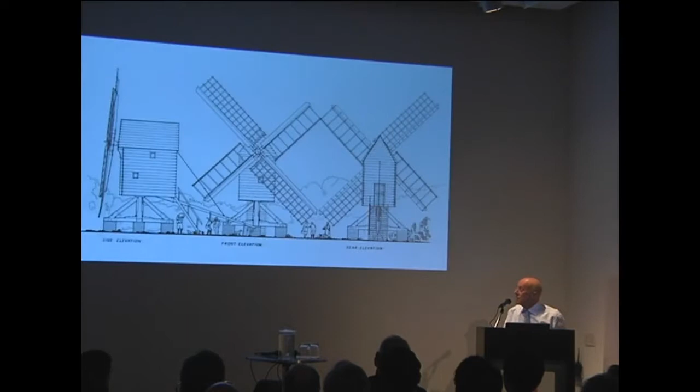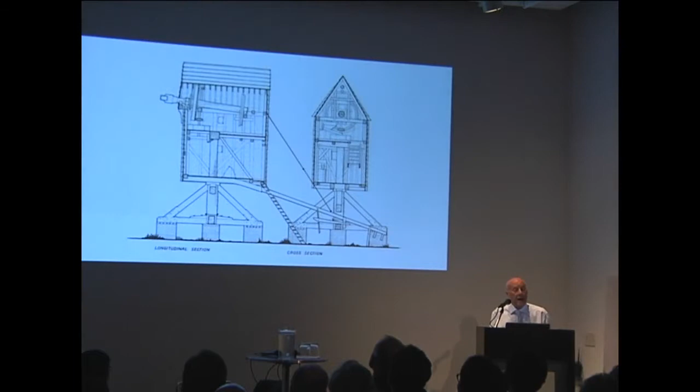I'm also photographing extraordinarily beautiful buildings like the Palm House by Decimus Burton and Richard Turner at Kew Gardens. And when I'm not photographing, every summer I'm drawing, I'm measuring buildings. And what buildings am I measuring? I broke the mold. Everybody at Manchester were drawing buildings like Georgian houses in the classical tradition. But I was fascinated by that anonymous tradition, by windmills, by big barns, not just what they looked like, but how they worked internally, how they were made, how a windmill functioned, and how the great barn was put together.

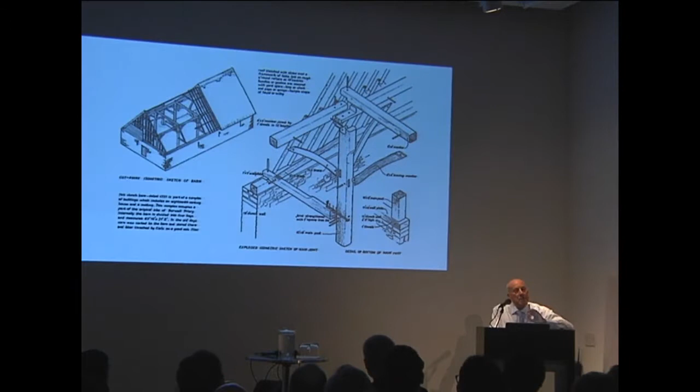And then later, when I left university, I discovered that I wasn't alone in terms of being so impressed and admiring those anonymous architects and engineers, because there was somebody called Bernard Rudofsky who in 1964 created an exhibition at the Museum of Modern Art and produced this book. And it was called Architecture Without Architects. It could have been called Engineering Without Engineers. But it celebrated those extraordinary achievements.

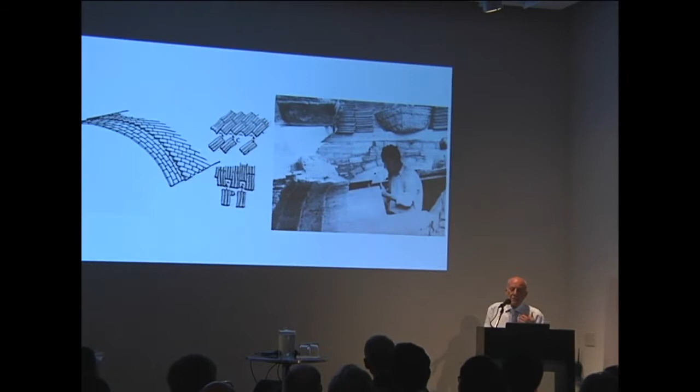And in those pages, we also see the tradition which led to Guastavino, because it was centuries old and centered mainly around the Mediterranean. So these anonymous architects, engineers, builders, craftsmen were essentially responsible for the achievements that this great exhibition in the museum and the books and the scholars are celebrating today. And the fact that he was able to develop those craft-based construction methods and patent them, and then lead to the kind of works that we've been touring earlier this morning.

How do we define those characteristics? Well, essentially, it's about optimization. He was able to create great spans, beautiful forms. They were fireproof. They had less mass. They did more with less. They were cheaper. In actual fact, he was competing on price. The fact that he produced something extraordinarily beautiful, which has endured over the centuries, is another great testimony. But he was just scoring on cost.

And there were wonderful stories in this book on that. And he was able to build quickly. He was able to build faster than anybody else. This is a very interesting characteristic. I mentioned Paxton. Paxton did the biggest building in the world. And he did it and designed it and built it in 8 months. And it was the cheapest thing that anybody could do. Nobody could do it in twice the time, at twice the cost.

So this tradition of doing more with less is, interestingly, I think, one of the prime characteristics of this anonymous theme in architecture, craft, structures, and is inextricably linked to issues in a market economy of materials and labor, the cost of materials and the cost of labor, and the way in which that might change over time has led to the birth of new technologies and the decline of other technologies.

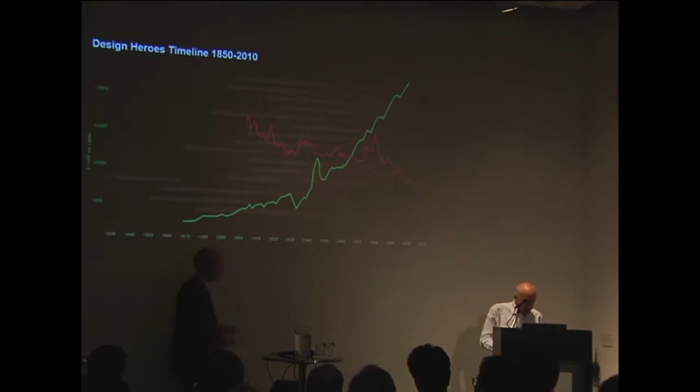So I want to start, or at least continue the theme of optimization by talking about shells, because they're such an extraordinary form. Just structurally, they're an amazingly efficient form. And I've put together a video, but I've got the models here, just the same models. Yes, thank you. This is just a hanging chain model. Very, very simple. Simply a series of interlocking chains which have no stiffness of their own. So they're only sagging under their own self-weight. They form the natural form that those chains with no stiffness of their own fall to under vertical load.

Then if I do the same thing with a form which is held in 4 points, we have a three-dimensional form, but exactly the same thing. It's a hanging chain. And the point about this form is if we find a position for any geometry that we want to have, any corner conditions, and we solidify that chain and turn it upside down, then we have a structure which in reverse perfectly resists the same load in compression rather than tension.

So I've tried to show with these models the difference between a flat plate. This is as flat as I could get it by hanging it and fixing it in resin. So this is basically a flat plate. There's no curvature here at all. And there's not very much stiffness. It'll move a lot under not very much load. That's most of the floors we stand on.

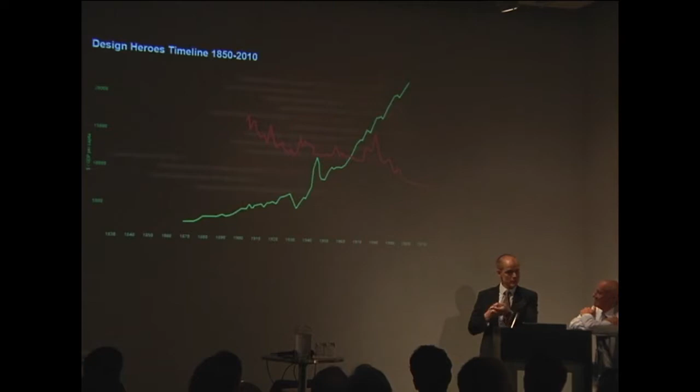What we found very interesting is when we looked over the period, over the 100 years, at what makes construction cost. Construction cost is made of materials and labor. Those are the two ingredients. A little bit of direct energy, that is the energy that powers the machines on site, but mainly the materials to make something and the labor to build it, us, people. And what's really interesting is that materials have got pretty much constant or slightly cheaper, and of course labor, that is how much people earn, has quite understandably got far, far higher.

And I was interested in why that was. Why would that be? Would you imagine that materials would get cheaper but labor would get much, much more expensive? And the hypothesis I have, after quite a lot of research into the area, is energy. Everything comes down to energy. The cost of a material which doesn't have a scarcity value, which doesn't have a brand, so not gold, not diamonds, not Gucci handbags, is pretty much directly related to the energy used to make it.

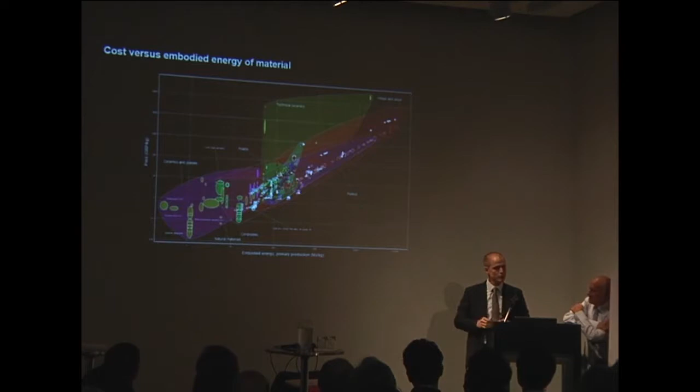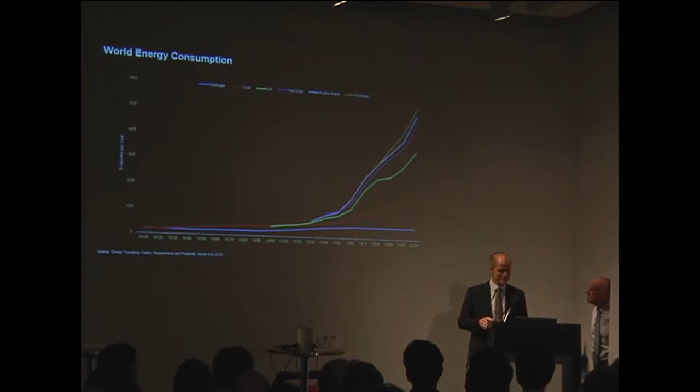Then when we move on to labor, why would that not apply? Well, labor basically is the amount of energy we consume. The amount of energy that society has consumed is very, very closely related to the GDP, the gross domestic product of our economies. So I found that really interesting, and I wanted to investigate where that took our design heroes, because the first design hero that Norman and I agreed on very quickly was Eladio Diesti.

This is a building that Diesti won a competition to refurbish. He kept the walls; all of the other entrants knocked the walls down. He kept them and built a new roof with, once again, this single layer of brick. So a labor-intensive process, but one that he could carry out, as well as being an absolutely extraordinary designer. This is the internal view of that, also a beautiful effect.

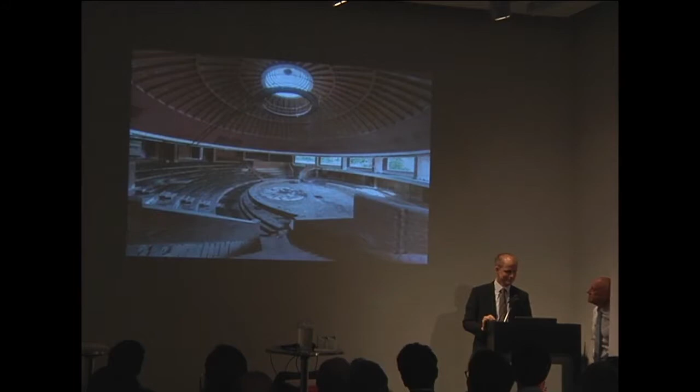So then I move on. Then I say, well, okay, so that was areas where there was a low labor cost. What about the rest of the world, Europe and the United States? And of course the story there is different. Labor's become far more expensive, so much so that in 1954, a Guastavino shell, because they were pretty much finished, they were just beginning to think about winding up, cost twice as much as a concrete shell. And the concrete shells really came from Europe, Germany in particular.

But the first of the heroes that we wanted to show was Pier Luigi Nervi, who solved the problem of buckling in a shell, which is the big challenge of concrete shells, by having these stiffeners, which were cast into the concrete. So he used extremely thin concrete, 4 centimeters thick. This is the Palazzo dello Sport in Rome, to make these absolutely beautiful structures. And he was very conscious of that. He was aware of the beauty of what he was doing. That was his concern.

And then to Germany. Germany was really where a lot of these shells came. There's quite a lot of load tests that were carried out like this, which you just think you'd really want to maybe put a sandbag there or something first.

So what happened in Germany, which I found absolutely fascinating, and in fact through this process learned more. I knew about the shells, but I didn't know about the history, is a company called Dyckerhoff and Widmann actually started simply making things out of concrete. They didn't start to make shells. They just thought concrete was an interesting material at the turn of the century to make things. And they made statues and concrete pipes. And then in their later generations, around about the 20s, they thought that it would be an interesting material to go a very long way.

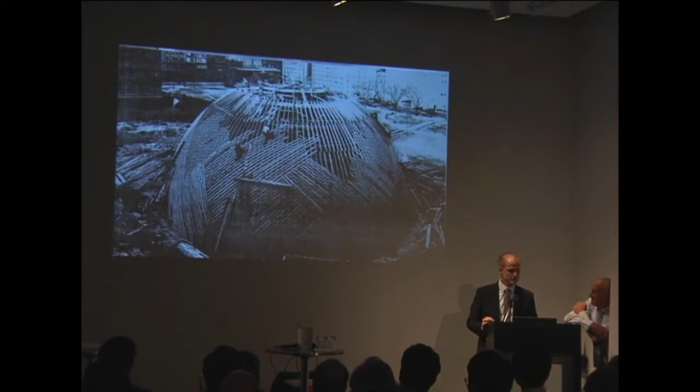And then from there, they took their shell technology to the States, and that was in the 30s with an engineer called Anton Tedesko, again a design hero of ours, and an extraordinary man who took this technology, and really that was the moment that Guastavino started to face very stiff competition, and they were sort of aware of it, but you could see that they hadn't completely grasped just how serious a competition it was. This is the planetarium that was built and sadly knocked down in 1997. But this is the Hershey Stadium, which still exists and spans 70 meters. It's a barrel vault with ribs and is only 3.5 inches thick in the middle.

Here's the most extraordinary photograph of it being built. It was built by Hershey's employees. That was what Milton Hershey decided should happen. So those are the people who normally work in the chocolate factory, building their own stadium. And there's the finished shell.

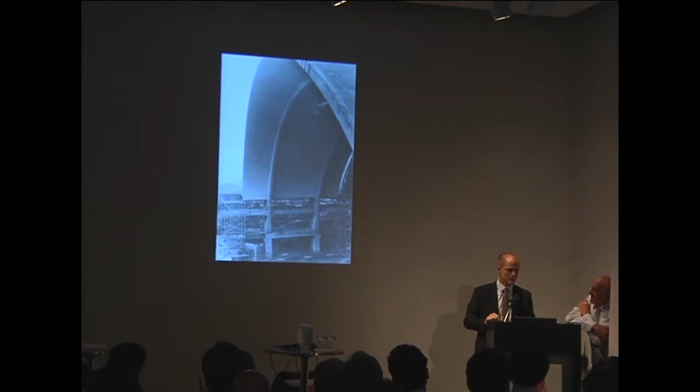So once again, extraordinary that a new technology came in as a result of optimization for different constraints, that instead of labor being plentiful and not too expensive, labor became more expensive, and so a process involving less labor was a more optimized response to that.

The final of our heroes that I wanted to talk about as a shell maker, and really the person I think who took shells to a whole other place, is Heinz Isler from Switzerland. And he took these very basic hanging chain models I was showing you and actually set them out and measured them. So he spent a lot of time, this was all obviously before computers, taking shapes, hanging them, and then measuring them and building them, which just seems incredible.

He also took pneumatic structures. He basically put air into a rubber surface and measured the surface that he got as a result, and once again built it. So this is the paper that he submitted in 1959 for the first conference of shell structures, and it blew everybody away apparently. What I really like is the fact he put etc. at the bottom. And sort of just an unlimited number of different forms could be created with double curvature. The whole point being there must be double curvature.

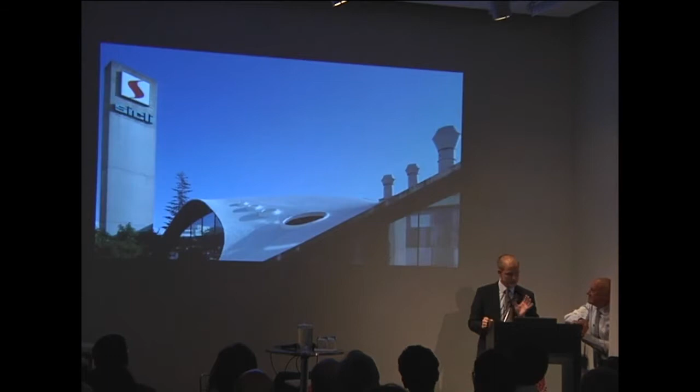This is one of his most extraordinary structures. Once again, just for a company, for the Sicli company in Switzerland. He did know about buckling, by the way. These things weren't done innocently. He did some quite impressive calculations to decide whether or not they could be achieved. Most of his work was done in Switzerland. He wanted very, very close supervision of them.

Here's another one in Switzerland. And then finally, I consider the most extraordinary structure, once again in Switzerland, exactly the same thing, taking a form, turning it upside down and setting it, measuring it, and then building that structure.

The other thing he did, which I find incredible, is in order to demonstrate this to himself and to others, he'd take blankets and he'd put them into his garden and spray them with water in the winter, and they would freeze, and he'd turn them upside down. And here's one of the examples of that.

I think that there are many ways in which we can find forms, and in one sense, these are the forces of nature, gravity, acting, frozen, coming from a somewhat different direction.

Buckminster Fuller, somebody that I was privileged to work with, collaborate with over the last 12 years of his life, was inspired by nature. And I can't remember any conversation with him where he didn't relate and demonstrate an affinity with the natural world, with spiders' webs, with shells, with plants.

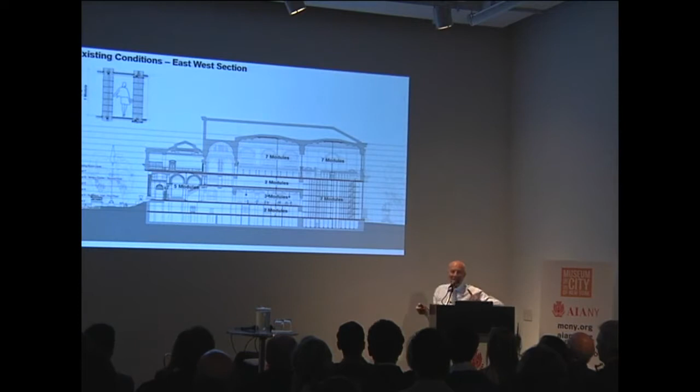Well, what you should see, I'm going to have to paint a picture for you. You should see the stacks. Okay. And as you can see, the stacks are on that module. So that is the module in that direction, and that is the module in the other direction, which is driving the geometry, the setting out, the architecture of this incredible, splendid building.

You will notice that the stacks are now empty, and they're always going to be empty, because it was, well, not always, it was for a long time decided that the books would have to move, because otherwise the Rose Reading Room sits on top of an unprotected structure. So you cannot have combustible materials. Now, the first move in that direction was in the last century. And that move, you can see the start of it here.

It was the opportunity for the library to vacate the stacks and to create safe, up to present day standards of preservation for rare books for the research library, to put those in appropriately protected space on site with exactly the same volume as the stack storage area, to house between 3 and 4 million volumes of books. And if you were to go there and see where those are on site, they're in this part of the 2-story building. The other story is going to be fitted out so that it looks like this.

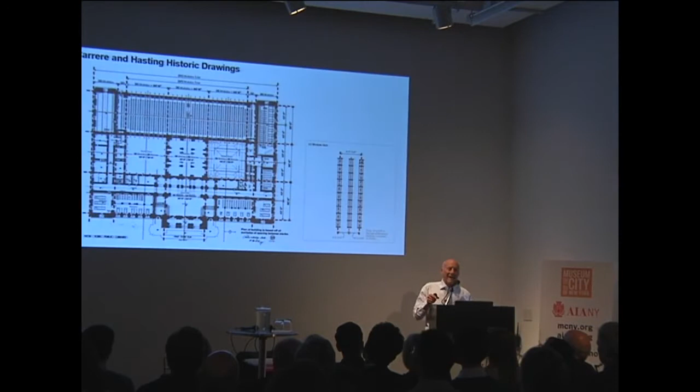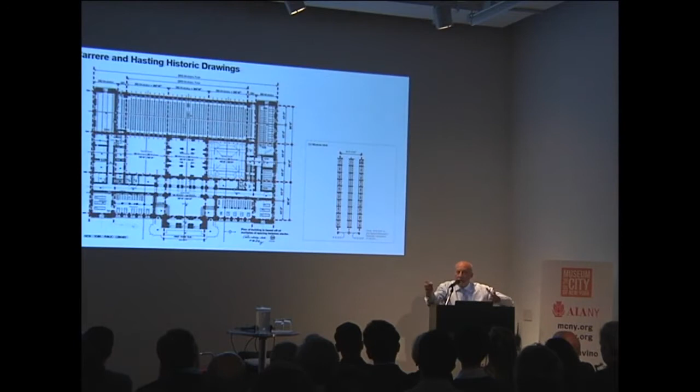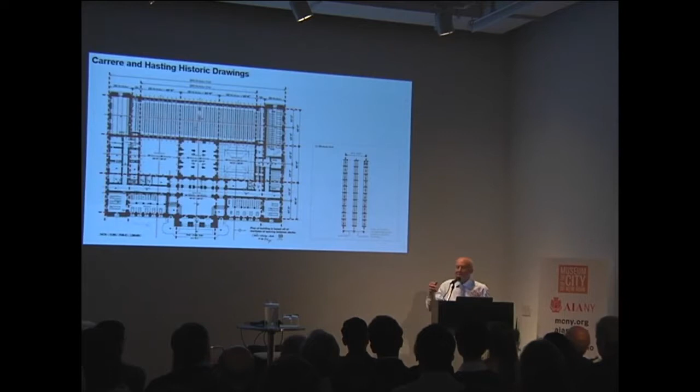So at that point, we stopped in our tracks, and I got Roger, and I had everything that had been designed on the project with the structure and the columns in the space, all pinned up. There were just the two of us, in the office. This was a little while back. What would happen if we wanted to keep the stacks? Some of them, all of them, and you can't put a structure in the space. And Roger said, I don't know anything about the New York Public Library. So I said, well, immerse yourself in it, give yourself a day or so, and see if you can work miracles.

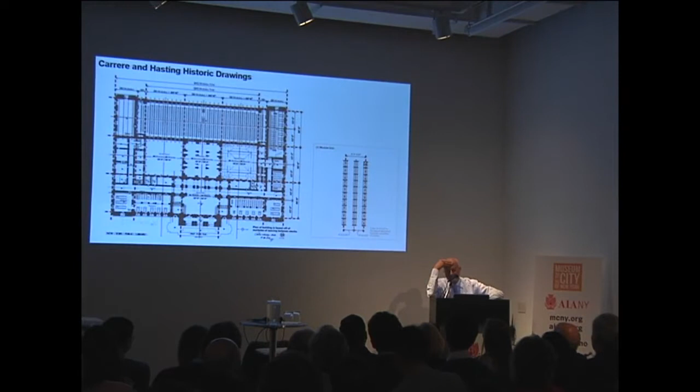And extraordinarily, and it's better if Roger explained this himself, but I'll do it for convenience, Roger discovered that all the windows onto Bryant Park had these structural pilaster walls. But every third one, on the top there you can see a red blob, had a tin duct. And Roger worked out that you could insert a structure that would carry a beam above within that space. And at that point, you had total freedom over the stacks. And what's more, he reckoned it was such a simple solution that it would be more economical.

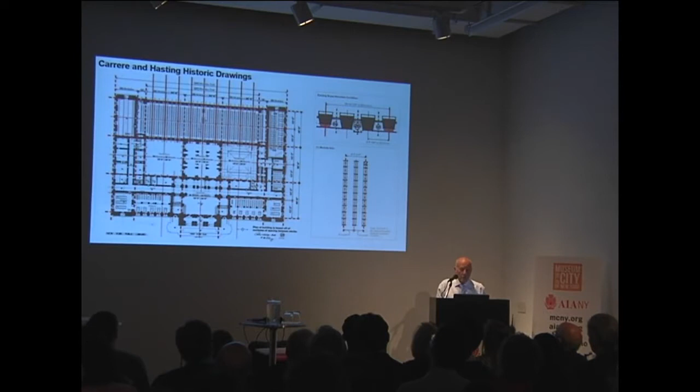And so that was tested, and Roger flew over, got together with the engineers who were assigned to the project. They had a fantastic relationship, and everybody loved the idea. So the idea took root. And so we can see now where such an idea could lead. This is a model, and it shows the stacks as they are now, supporting the Rose Reading Room.

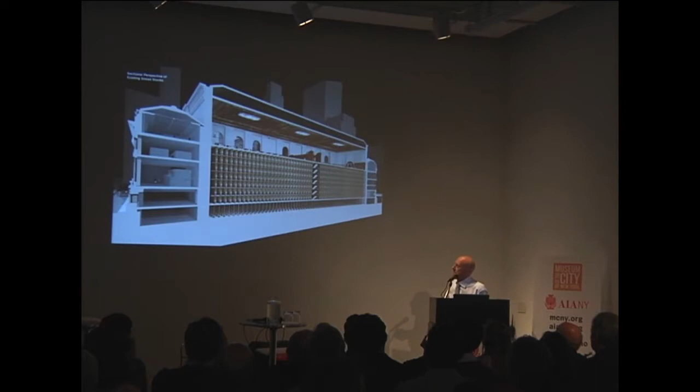And by this very discreet, highly economical, very elegant solution of inserting in the walls, beams can span under the reading room. The reading room is protected for all time against fire, and the structure is combined with a distribution system for air and filtration. So it can be filled with books or half filled with books, because the stacks can go back exactly where they are. In actual fact, some of them don't even need to move at all. You just need to take the floors out or leave them in. So you have complete freedom.

What is also very nice is that this new lending library, circulating library, can have its own dedicated entrance off 42nd Street.

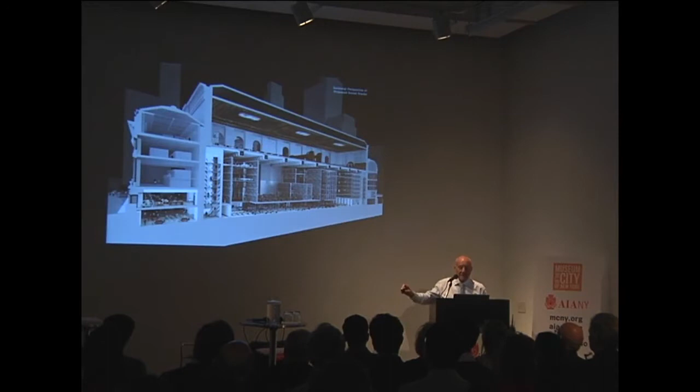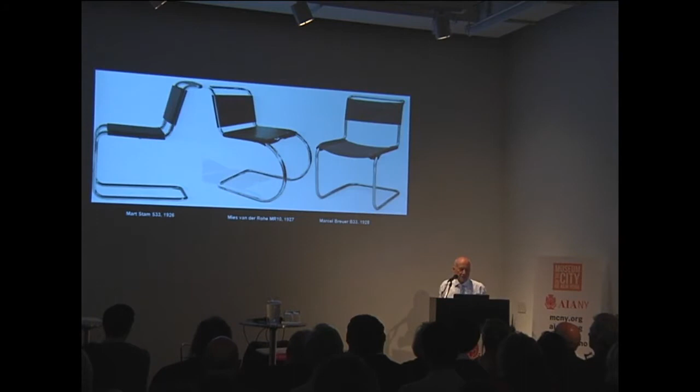It's skipping, but I think maybe it... Just use the arrow.

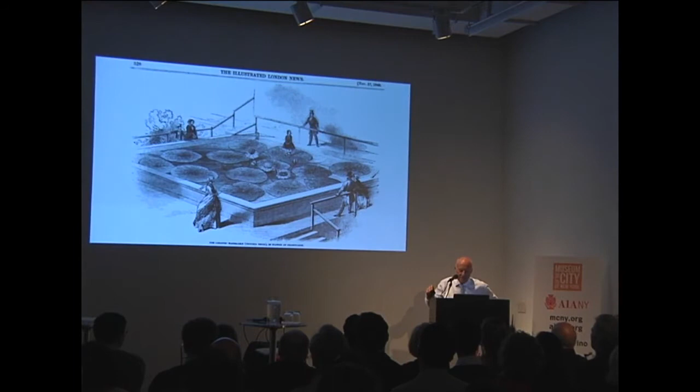And in the next image, in one of his gardens, he's musing on the ability of natural forms, the giant water lily, to be able to support his 7-year-old daughter. And in that wonderful tradition of natural forms and this amazing gardener, intuitive engineer, architect, I often wonder about whether there's any relationship between those lily pads touching and Frank Lloyd Wright's extraordinary lily pads which touch, and a series of individual cantilevers.

And Frank Lloyd Wright also, one of his favorite objects is one of my favorite objects, and that is the Gullwing Mercedes 300 SL. And interestingly, that fits into my anonymous design tradition, because unlike Harley Earl or Pininfarina, this car didn't have a kind of name designer, but it has the most stunningly beautiful lines. And of course, the Gullwing doors are absolutely unforgettable.

But what I'm sure many of you know is that the Gullwing wasn't some kind of whimsy of a designer, like let's have some kind of trendy new door. It was born out of the fact that this car was designed to win races, and the only way they could improve its performance was to make it lighter. So in that tradition of anonymous designers like Guastavino, the only way they could do it was to make the structure close to a monocoque and deep and thin tubes. That's where they would save the weight. That's how they would go faster, which meant that the whole depth of that sill was structure. So you couldn't have a conventional door. So the Gullwing was a response to that problem.

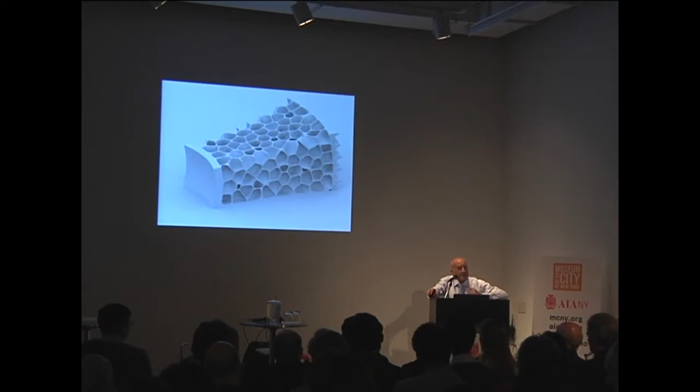And the closest you can get to moon dust on Earth is in a volcano, volcanic ash. So part of the feasibility study for the project was to check whether we could use the three-dimensional printing process, robotically controlled, and whether that was truly feasible. And this demonstrated its feasibility.

I should add that we are one of three entities acting at the invitation of the European Space Agency. One group is based in Holland, and the other group is based in Italy. And because of our pioneering work in three-dimensional modeling and engineering abilities, we were invited to be part of that consortium. And we've worked with the astronauts and with the various engineers.

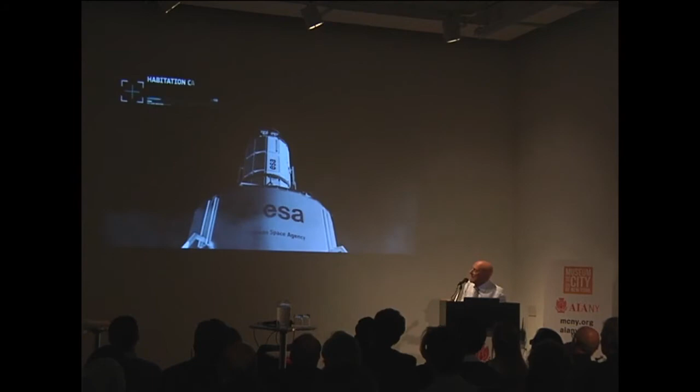And there's a small film which talks a little about the project and shows how that might work in reality. Not might, can work, that we've demonstrated. So you have the challenge of transporting the lightest, smallest amount of material and machinery that can be robotically controlled in an environment which goes at a high of boiling point, 212 degrees Fahrenheit, and at its coldest is minus 270 degrees.

And then another challenge is if this structure gets damaged, and what are the hazards? The hazards are meteorites, great rocks traveling at faster than the speed of a bullet. So how do you design a structure that can absorb those kind of shocks, withstand that, create enough dense insulation also to control the temperature?

And this simulation explores how, by sending out machinery, by using the local material, combining that with the minimum amount of binder as glue. And here you can very clearly see that cellular structure. Remember, the cellular structure has been made out of that combination of moon dust and the binder. But the holes are just filled with the dust, which acts as a cushion against meteorites, provides the insulation,

and again determines the form. So I think that this is probably pushing the idea of an anonymous architecture, very much in the tradition of creating three-dimensional forms and vaults in an extreme environment. And the elements which contain the inflatables also are reused as the entrance locks. So everything has a double use. It's not just a piece of kit for transportation which is then abandoned. So, thank you very much.